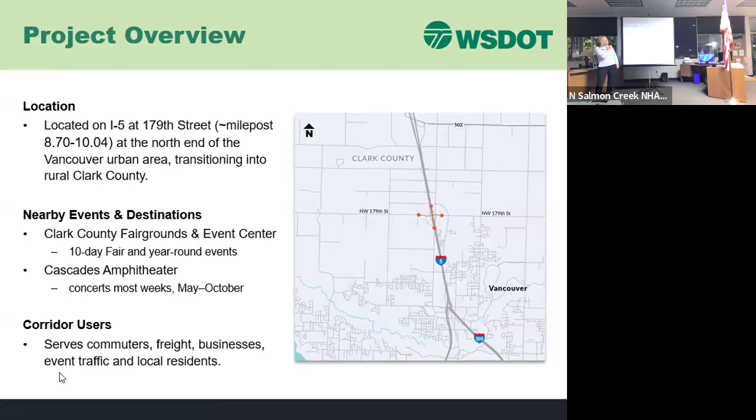The interchange project will improve safety and mobility at the interchange by replacing the existing signals out there today with roundabouts, and replacing the existing bridges that carry I-5 over 179th Street, and addressing fish passage barriers through the area. All of this will enhance access for drivers, freight, and all users of the corridor. Mobility is a big topic at this location. Roundabouts, besides reducing serious crashes, will keep traffic moving smoothly through the interchange. We're also including new shared use paths and crossings for safe routes for bicyclists and pedestrians and other people who go through the interchange area, and will include upgraded ramps, lighting, and signs that also enhance safety and mobility.

And growth. As any of you who've driven down 179th Street know, there's a lot of development, a lot of houses going up, businesses coming, lots of growth in the area and beyond the actual corridor. So the interchange improvements will support this growth by reducing congestion and improving access to I-5. The project is working in close coordination with Clark County. There are projects along the 179th Street corridor that are Clark County projects that our project ties into, so we've been working to make that a seamless transportation system for all users. Next slide, please.

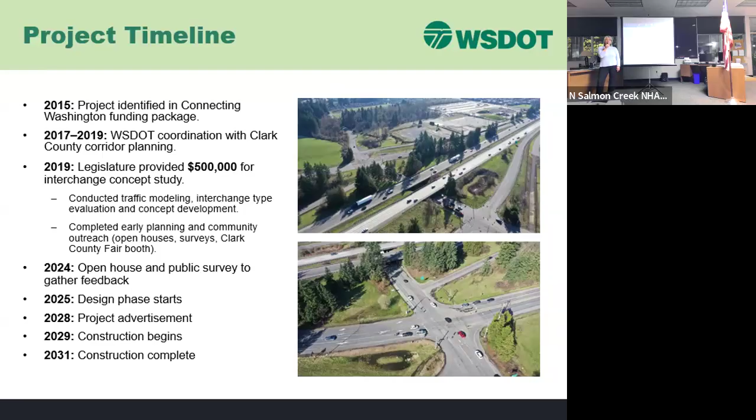Now in 2025, we are in the design phase. This is the detailed design phase where we build more detail into that concept and refine those details. We plan to advertise the interchange project for construction in 2028, so quite a bit of time between now and then to refine details. Physical construction is anticipated to start in 2029, with construction complete around 2031.

So, community engagement: we spent a lot of time working to understand what matters to the community, and we've heard a lot of great things. Some of the key things we heard are that safety and congestion are top priorities. Event traffic is definitely a concern, we heard that a lot. People want us to keep traffic flowing and improve bike and pedestrian access, since there are not good bike and pedestrian facilities through the interchange area right now. Folks also want us to minimize construction impacts on businesses and neighborhoods.

And vehicle sizes, we've got some excellent input from the public on the vehicles that use this interchange area, really good detailed information about truck lengths, axles, and all the different types of vehicles. That's really helpful for us to be able to accommodate all of those vehicles. Lastly, we heard about travel patterns, when people use the interchange and drive through there, which is helping us avoid those peak times and minimize construction impacts to folks driving through the area. So that's what we heard.

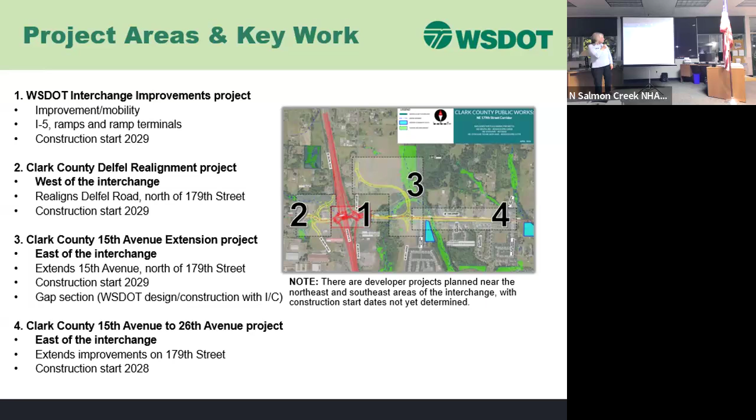This shows our project concept. The colored line work is what WSDOT is designing and overseeing construction on. And this is just a little more zoomed in picture of what I just showed.

You can see on the left side of the screen here, that Delfel Realignment project that the county is undertaking. That's a really nice project in that it creates a nice straight shot local arterial on the west side of I-5. And then similarly, the county, on the right side of the screen, is extending 15th Avenue to meet up with 10th Avenue, another north-south arterial corridor, local corridor, in the area.

And then I-5, of course, in the middle. So there's some really good options for travelers to choose a north-south route. And one real benefit of all these projects put together is that the whole 179th Street corridor flows a lot better. We remove some of those alternating traffic issues that we're seeing today, where maybe a local road will tie into 179 and the traffic doesn't flow very well in those spots. This North Delfel spot and this Union Road spot here are two.

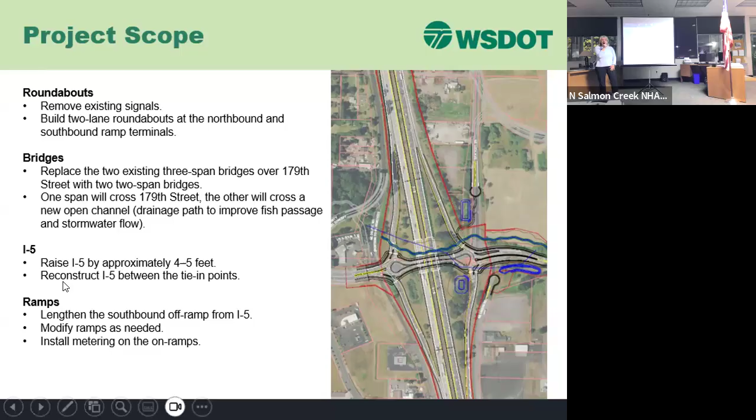Other scope elements as part of the interchange project are bike and pedestrian improvements. We will be building 2 shared use paths along 179th Street, one north of 179th, one south of 179th. They're 10 feet wide, and they tie into the county projects on the east and the west. So for users, they'll have a seamless way to get from east to west, both on the north side and the south side of 179th. There will also be safe crossings of 179th and the ramps.

Fish passage: there is currently an existing small pipe under I-5 that is a fish barrier. We're replacing that pipe with a new open stream channel on the north side of 179th Street. The new stream will run under that second span of the I-5 bridges that I mentioned, as well as the ramps. That stream connects to another stream segment that the county is building as part of the Delfel Realignment Project, so it's one continuous stream. And it will have a minimum opening of about 18 feet under the ramps.

Other scope elements that we're building would be drainage systems to manage runoff, to collect all of that stormwater runoff and treat it. We'll be including new traffic technology, signs, and street lighting, and acquiring property rights as needed to support the improvements. Next slide, please.

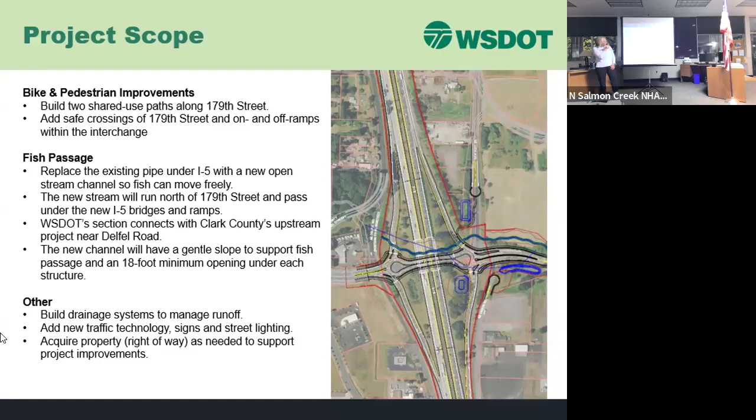And so why roundabouts? Roundabouts are very efficient at moving traffic, and that's what we need at this interchange, is to be able to move traffic efficiently. They work really well, and they have fewer long backups. They're also very good at reducing those really serious crashes, injury crashes, like those T-bone crashes that you sometimes see at signalized intersections. The way that roundabouts slow people down and curve people coming into them really helps to minimize crashes like that.

They also are able to handle all users: freight, commuters, bikes, pedestrians, trucks. We get a lot of questions about trucks and roundabouts. So trucks can navigate the roundabouts by driving up and over the truck apron. You may have seen in a roundabout this center piece that has some curving and then a flat spot.

That's actually meant for large trucks when they go around the curve, to have their back axles right up on that. It's called a truck apron. So that's intentional. They can also straddle lanes in a roundabout, a two-lane roundabout, for instance. That's intentional and allowed for.

You want the one that has the whole big picture? That would be great. There you go. Let me slide this over and down.

So, like in some of the corners here, we might need a little more property to build the project than what WSDOT currently owns. So, that part I get—I guess I'm asking how. How do you do that?

So we have a real estate services group that would work with the property owner, letting them know we need a section of their property. They would appraise that for fair market value, and then work with that property owner to purchase it for WSDOT, so that we can have all the rights we need to build the improvements.

Do you allow for that in your schedule in case there's a problem? We do. In fact, the environmental review process plus the right-of-way process are always kind of the longest timelines in a project, including this one. Design is much faster, but those processes, especially because they have unknowns, take a lot longer. So yes.

Other questions? Yes. With these roundabouts, where do you guys—when you say that studies show that they're better—personally, being on the ground, I don't know what studies you're looking at. The ones in France, I've driven those, but they're huge and it's way different. Yeah, they are. But over here, lights just tend to work a little bit better.

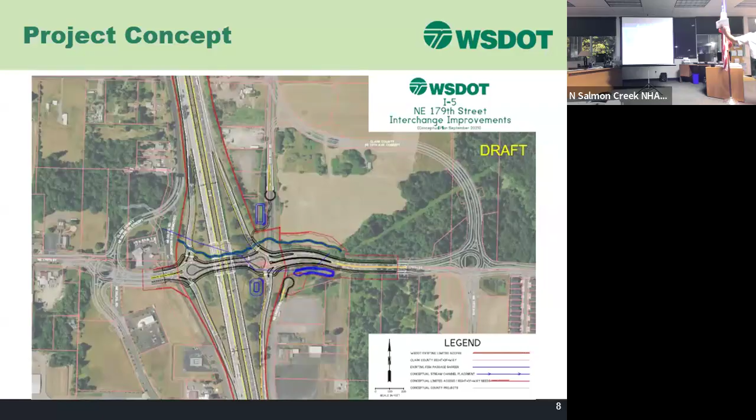So we're going to move from the big state level to more local traffic issues. Last time we had folks talking about the restriping in front of the schools out there. Looks like that's pretty well all completed now. Hopefully you're finding very little impact on your day-to-day commute, maybe even a little better during rush times, the drop-off and pickup times. Give your feedback on that. I'll let them know these are works in progress, and they'll try things out and adapt as they go.

We're going to move to a more local level. We talked about 179th Street, and now we're going to have people talking about the local arterials and what we can do on your local traffic. If you're finding your street has become a cutoff point or shortcut for other people, we've got some grants and things to help with that. So going from the state level, last time we talked about the major arterial on 179th. Now we're going to go to your neighborhood streets.

Do you have a quick question before we start? I was just wondering, you said we can put our input in on that traffic section? Yes. Where do you do that? They have a website, and Laura will be able to give you more information.

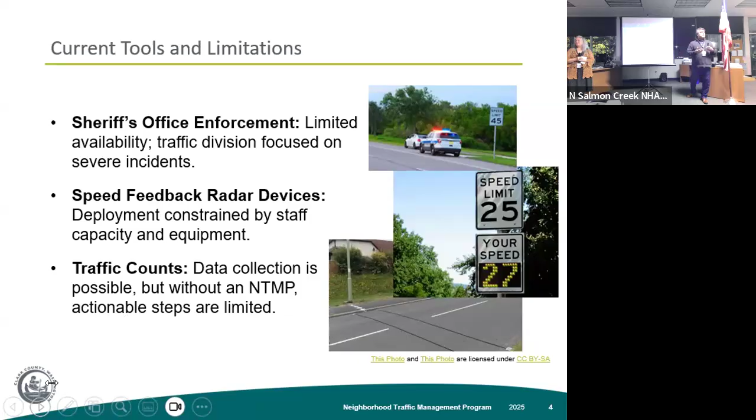But without this neighborhood traffic management program, the data we collect can tell you what the speeds are, what the volume is, but we really don't have any tools without this program. So that's what this neighborhood traffic management program is all about. Why do we need the neighborhood traffic management program?

My experience in being in this position, I get to delegate the customer service calls to my traffic engineers. A lot of the calls that we receive are due to speeding.

This program will provide a consistent, transparent process for addressing traffic complaints. It will give us more tools in our tool bag to try and help reduce speeds. And the goal here is to enhance the livability and the equity across the neighborhoods as we apply this program.

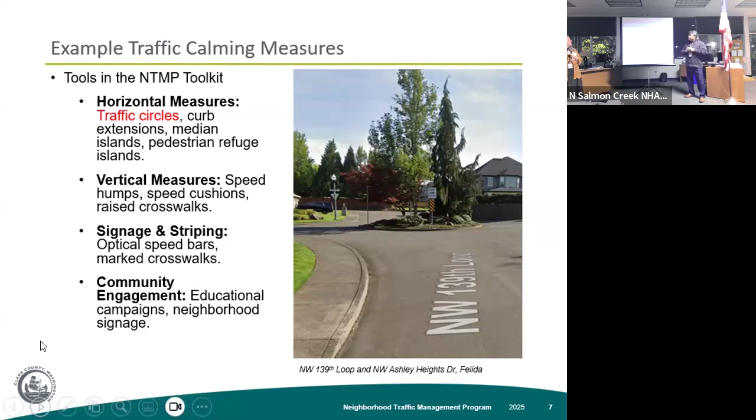Vertical measures: speed humps, speed cushions, and raised crosswalks. These are things that they can ask for. I don't think this has been clearly stated so far in the slides, so all of these measures here are these tools that we're talking about.

These are tools that we have in our tool bag. So we'll go out and collect the data, and look at different types of traffic calming measures to see what may work to help reduce the potential for whatever issue was identified. At that point, we'll come up with some recommendations.

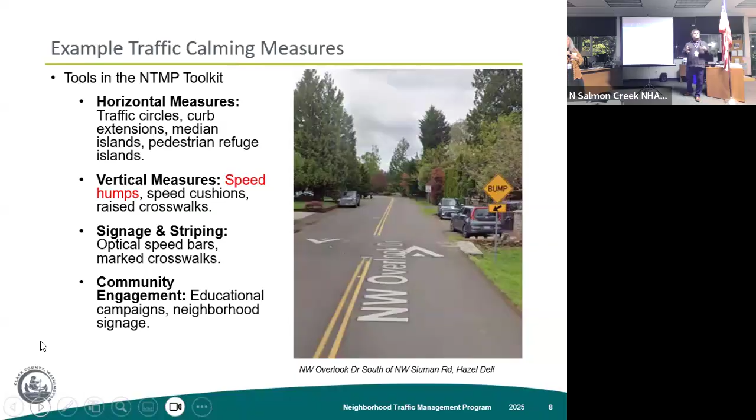At stage 3, where we're engaging the public or the community, we'll come to you with what we found, what recommended traffic calming measures might be for your neighborhood, and talk about what might fit best, or what you believe might fit best, and see what we can do there.

Moving on, some low-cost tools: signing and striping. Optical speed bars is one of them.

I'm not sure if you're familiar or have gotten as far south as 88th Street between 94th Avenue and 72nd, down near the Costco and Home Depot area. We installed some optical speed bars.

That's these guys here. The concept is that those painted lines start really far apart and then narrow up, or get closer together, as you move down the road. As you're traveling through those, it feels like you're going faster, so you take your foot off the gas. That's the concept behind optical speed bars.

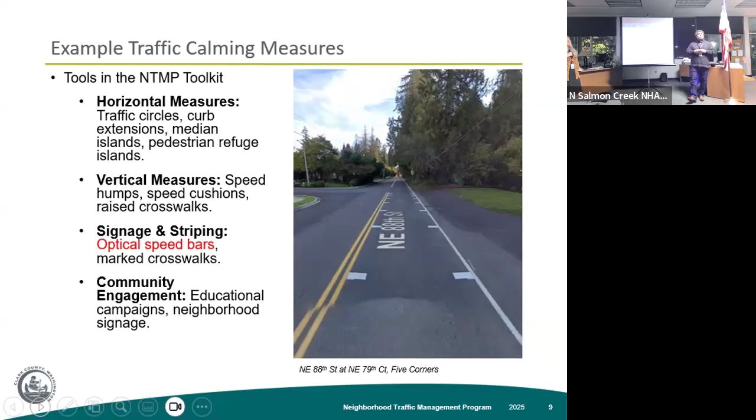Marked crosswalks is another signing and striping tool. But what has me really excited is the community engagement we get to do. We get to come out and talk with you folks and make sure we're addressing what you guys need addressed.

So the program anticipates having dedicated staff. What went to council and was adopted was 2 additional full-time employees to manage the program. They will be overseeing the submittal application process, maintenance of the website, and reaching out to applicants if there are questions about requests that were submitted, to get further clarification.

They will be working on collecting the data necessary to make decisions on which projects move forward. And ultimately, they will also be the ones working directly with you folks on getting the feedback necessary to determine which of those tools we just showed might be an appropriate solution for a problem you have. The goal is that the county would receive fewer calls about safety issues because we're helping address them through this program.

So the timeline for this program: the neighborhood traffic management program was presented to council during a work session earlier this year. We presented this program to our planning commission and development engineering advisory board in April of this year. County council adopted the neighborhood traffic management program in May, and our program launch is scheduled for January of 2026.